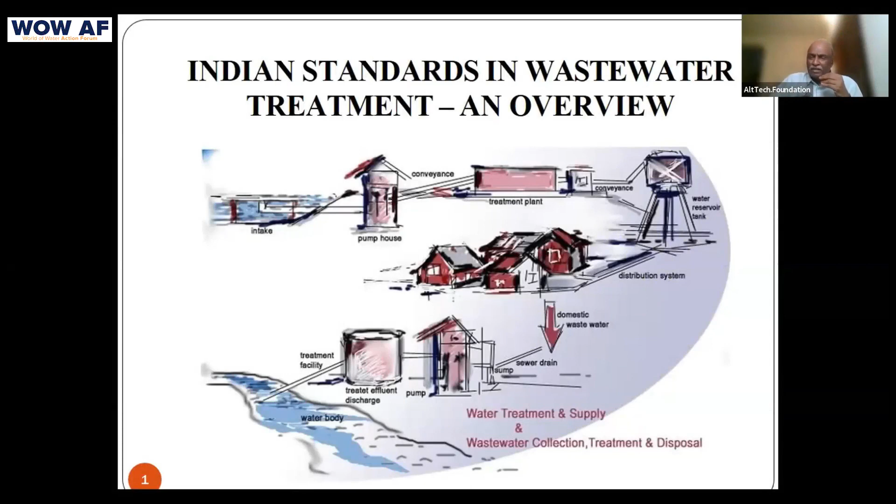In industry today, when you and I walk into a client's place, he's not willing to listen to anything until you talk cost and recovery of cost, meaning investment payback.

Wastewater is emerging at 38,000 to 40,000 million liters per day, which is about 7.5 to 8% of daily water being used by the urban sector. 8% only. This 38 million is only 38 billion liters, which is urban wastewater, meaning things that you and I use.

Double of that nearly, or 1.5 times that, whatever—there is industrial wastewater, which actually lies anywhere from 12 to 14%. So if this is 7, that is 14%.

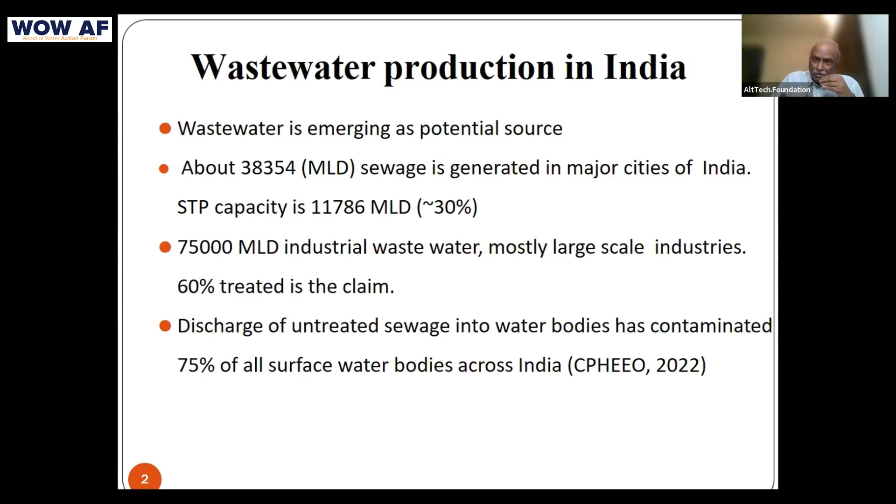If I leave these two out, the rest of it is only agricultural water. Who is providing agricultural water? Nobody. 15% of all irrigation done in the country is from dams and such things. Where is the rest of the water coming from? Nobody knows. Does the farmer get a salary at the end of the month? No. Is he an entrepreneur? No. Can we survive without farmers? No. Nobody wants to talk about agricultural water anyway.

Now, who governs all of this? In the last 10 days, I have been searching everywhere as to who is giving us any regulations. You'll be shocked to know, not surprised—all of you will be shocked to know, as industry leaders, there is no single regulation anywhere for wastewater.

Nothing as regulation. So the State PCB has nothing in this. Central PCB says, we don't know about this. The Jal Shakti Ministry says, what is this anyway? This is not something that comes to us.

MoHUA, which means CPHEEO—this CPHEEO engineering organization is a thing that comes under MoHUA. It is not coming under the Jal Shakti Ministry, for whatever reason.

Shocking to me, right? Now, you all know Part 8, which is to do with HVAC and such things, is undergoing some revision. This Part 9, if you go and look at the link to the National Building Code, seems like it is an afterthought. Somebody forgot, then they said, oh my God, we have forgotten this—and they put it here as Part 9.

And if you scroll down on the page, after that is annexures. My God, the National Building Code does not have anything on wastewater.

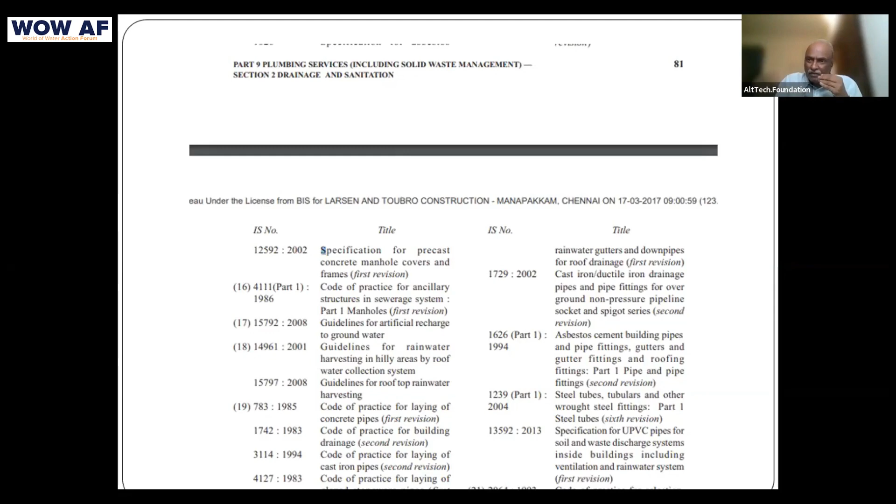This is the manual. There is something called a manual, and look at the date—1999. Ravalji says the 1966 National Building Code has not changed, and that was probably copied from the UK's system, with a little bit taken from the American system, both of which are not valuable or relevant for us.

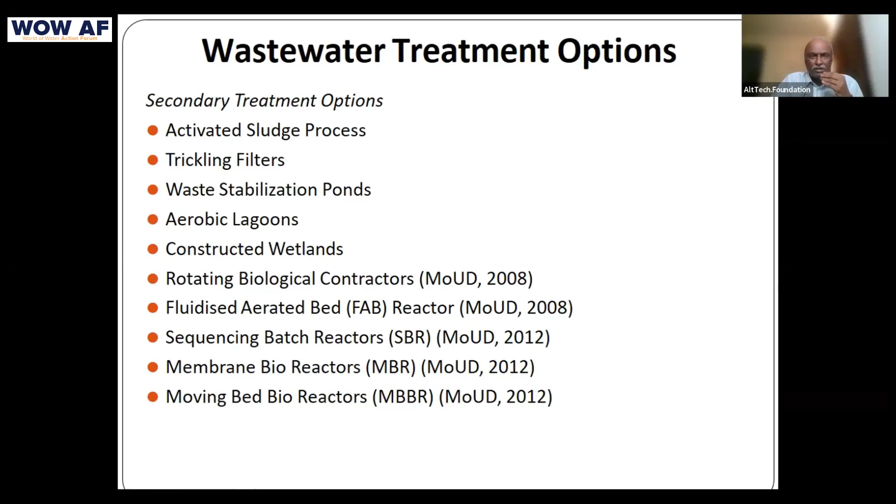And then in all these conversations we have had—about 300 to 400 hours in the WOW Action Forum—we have all said this is all wrong, please do not do it, except for maybe constructed wetlands. I'm not the expert on this—Ravalji knows about these things, and many of us have spoken about it in the past, and we have heard and learned from many such experts.

This is the other thing: no separate regulation or guidelines for safe handling, transport, and disposal of wastewater. This is not my words—this is from the CPHEEO document. There are no separate regulations or guidelines for safe handling. I was shocked when I read it.

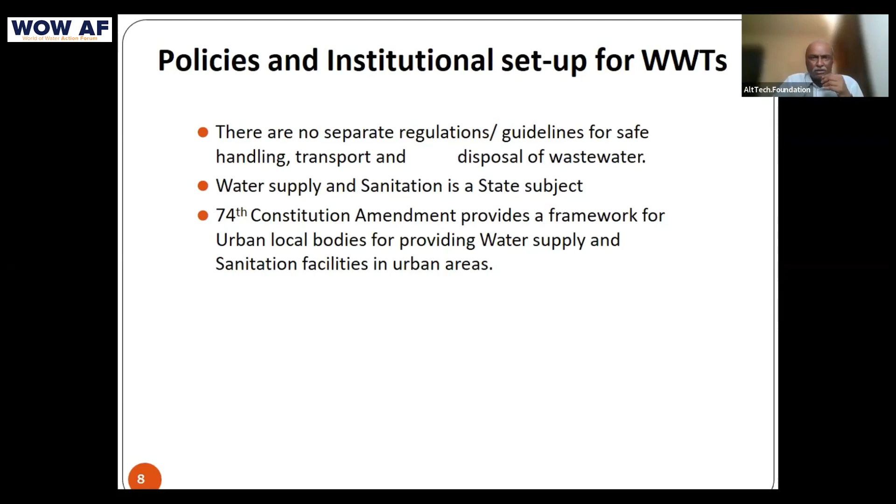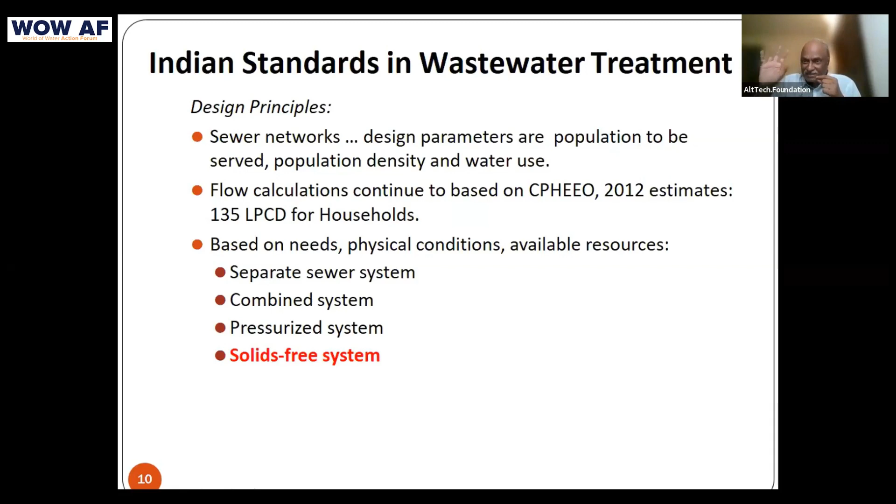Design principles. There is one line somewhere I found in the design principles of the CPHEEO on standards on solids-free systems. They mentioned it, but interesting that they mentioned it there, that there is something as a solids-free system as a standard. So I thought I'll bring that to your attention.

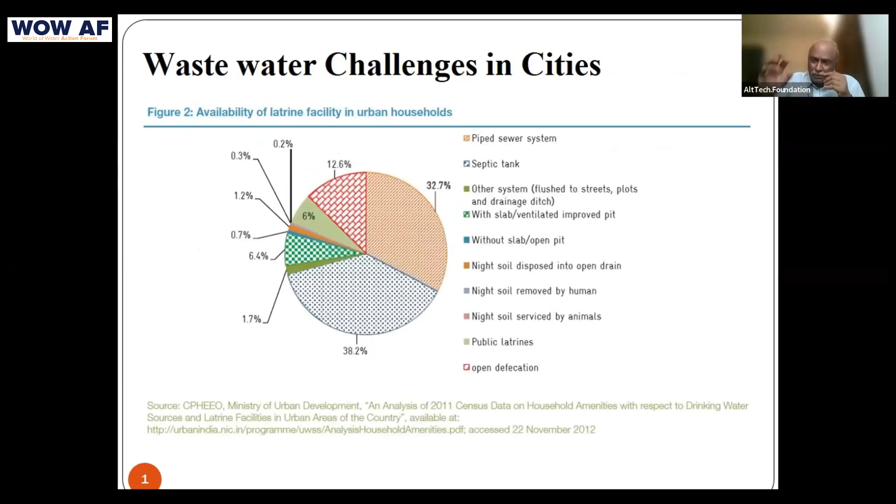This is all things you know. 1/3 of our cities only have got systems of the kind you and I have got in our homes. 32%, 33% is all that we have as connected STP lines. Only 1 out of 3 people in India get the privilege of a line of this kind where we can flush things down the tube.

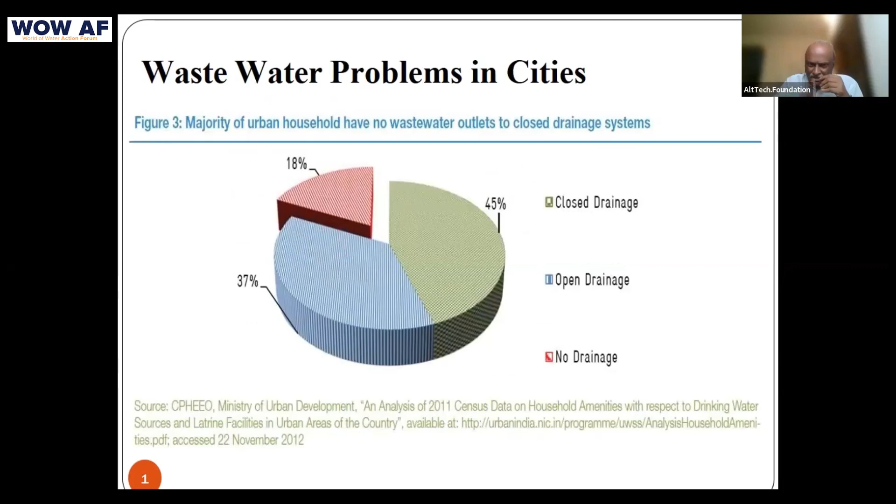Drainage closed system is only half. 18%, 1/5 of our population have no drainage, which we know. This is not about all population, this is only cities I'm talking about. Urban households I'm talking.

State-owned, look at this, this is a mess. Don't talk about STPs, but that the government will do, cities will do, or administration will do. Those fellows want to keep the money, we all know. Ask Mr. Iyengar, he will tell you. Governments do not want the solution to be localized, because then they will not get to spend another 5,000, 10,000 crores that they will happily spend and knock a bit of it for themselves.

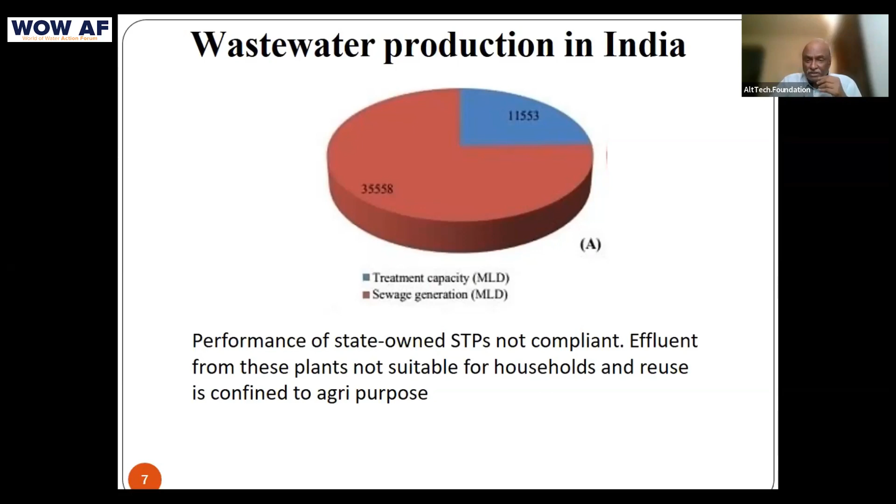Problem is, therefore, this is the big gap that we have. Not even a third of it is treated. Sludge removal handling is the most neglected in STPs. These are not my words, these are words taken from one of these documents. Poor design, poorer maintenance, breakdowns.

You know what happens for every wastewater treatment, SBR, MBR, etc. One hour in the morning, let's say there is a power shutdown. But by the time the reactor gets stabilized, it becomes 3 or 4 p.m. Of course it will stink. Why will it not stink?

And then we'll blame that fellow. That poor fellow will be hauled over the coals and told, Abhay, what did you supply to me? I have paid you this much money. And that poor fellow will come also, he has to make a living.

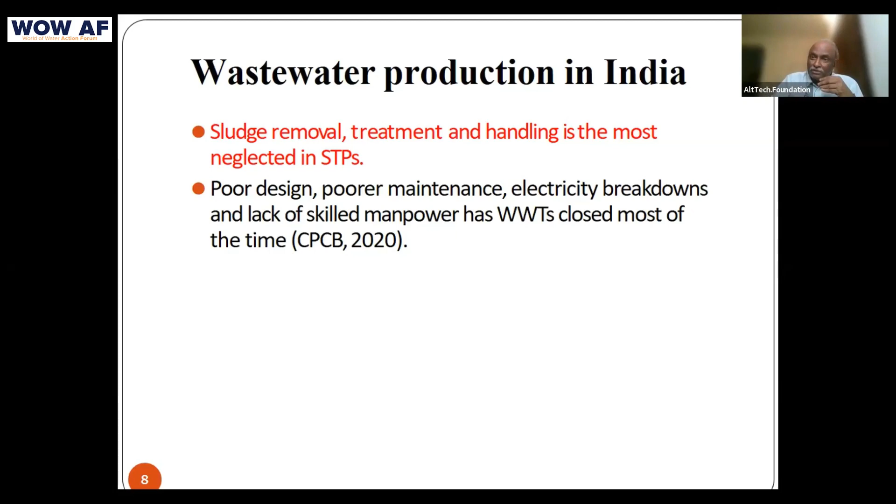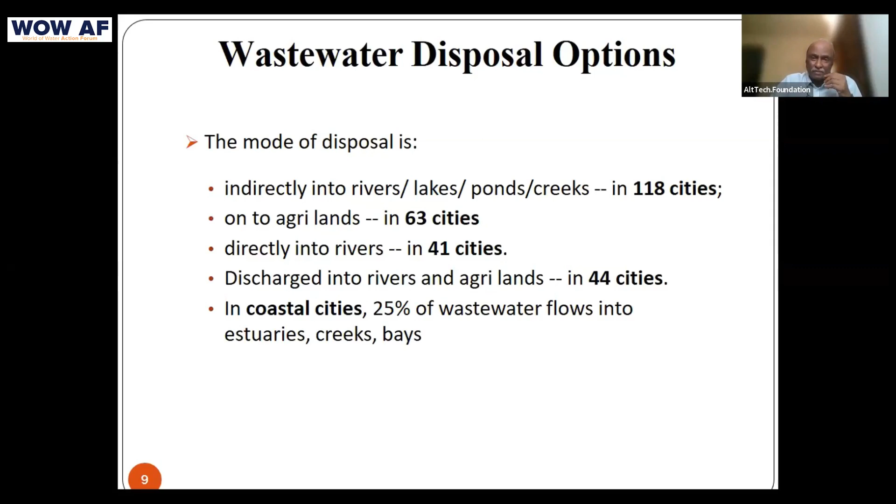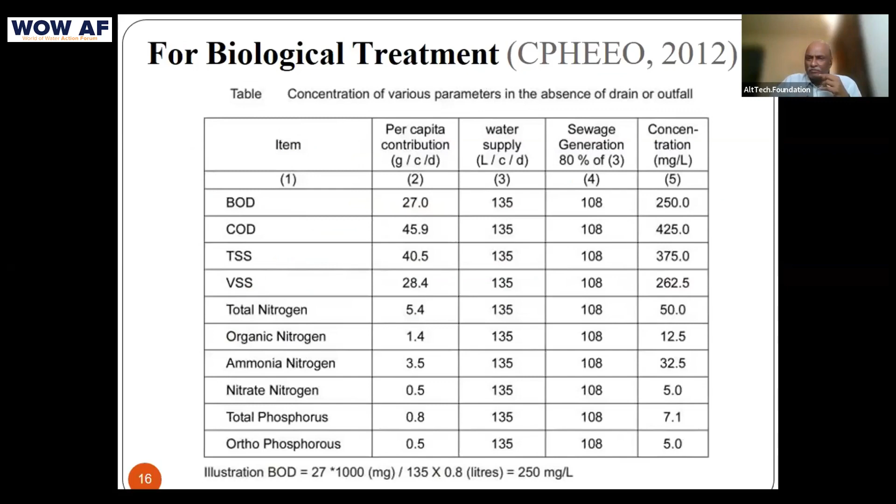Discharged into rivers, 44 cities. Coastal cities, 1/4 to 1/3 of the water goes into the sea. And why do they talk about BOD? Rawalji holds his head in despair every time he sees something like this. He says, why are you bothered about BOD, whether it is in lakes or in wastewater treatment systems?

This is the other thing they're giving - look at this one. There is, in CPHEO, interestingly this also available. Now, I can't understand how, when you have something like this for treated sewage usage as drinking water, why will this not be promoted? I'm not understanding that. I want to know from some of the distinguished minds here, why is this still from 2012? It's not like this government did not wake up to these things - Singapore introduced it in 2002.

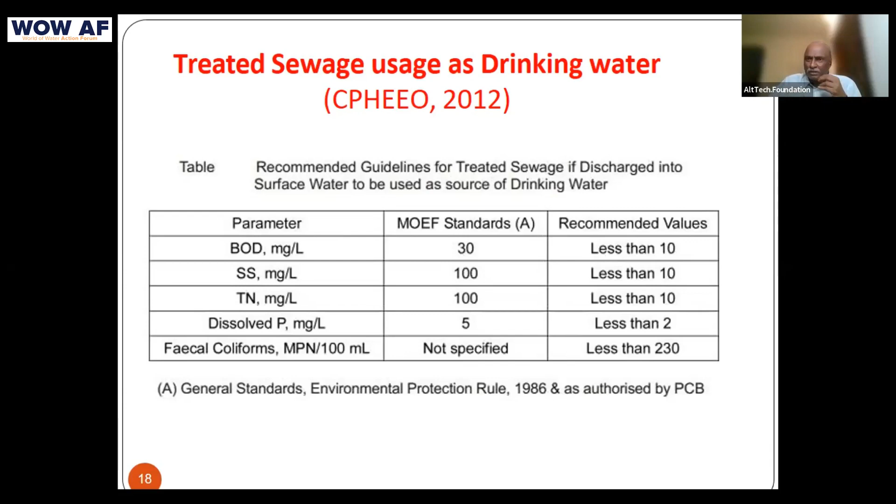Today in Bangalore, I can tell you there are at least 10 people who can do this as solution providers. Why are we then not taking it up? You ask people in companies, they'll tell you, oh you don't know, I say we are all doing it - and what do they do, they use it for chilled water. CPHEO also recognizes treated sewage, post-STP water treated and used for chillers, for water-based chiller plants. Why are we not taking those steps that are already available in the CPHEO? They put it there 12 years ago, 13 years ago, and we are not doing anything about it.